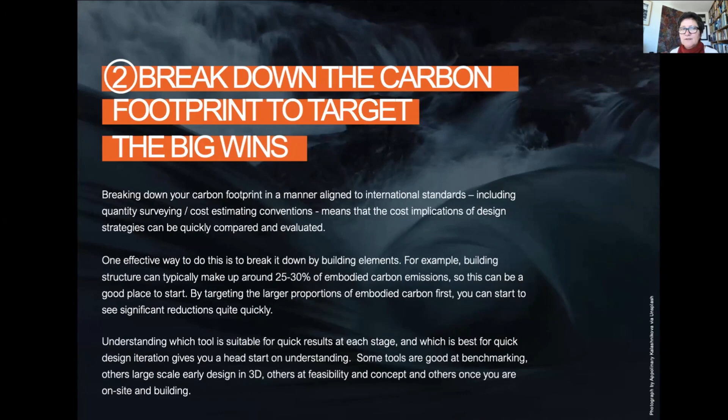We obviously have operating carbon. We all know and love embodied operating carbon, often known as scope 1 and 2, electricity, gas, etc. And that happens every single year across the life cycle of a built asset.

And then we have embodied carbon, which occurs in a couple of different phases. We have embodied carbon in the materials to make the building to practical completion. And then we have what we call replacement or use embodied carbon that occurs as we go through the asset life cycle. That can be just to maintain the asset yearly, or it could be to replace things after they've finished their life - carpet, for example, at 10 years, paint potentially at 5 years, and so on.

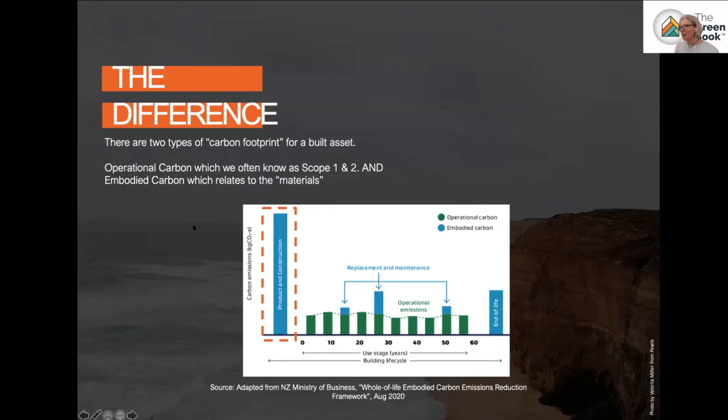So when we talk about the definition of exactly what embodied carbon is - technically, embodied carbon is the coalition of all the direct energy inputs as well as the indirect energy inputs to facilitate the organisations that make the materials, basically from the point of extraction of those materials all the way to their point of installation in the building. Some people would know this as cradle to gate.

Some of you may be familiar with the product phases A1 to A3. In this picture, we've broken the embodied carbon phases up into what we call upfront embodied carbon, which is from cradle to finished in place, doors open in the building.

And then, as before, there's also this thing called replacement carbon, and there is a scope of carbon at the end of life. What's really important to understand about end-of-life accounting for embodied carbon is that you have to separate that out, because there's a double counting problem if we claim at the end of life, but also if we're purchasing recycled materials on the upfront side, you can get this double counting problem.

So I'd like everybody to focus on what we call the embodied carbon upfront, which is these two phases of upfront plus material use. Let me go back over that: embodied carbon, from cradle to finished in place, splits into two key phases, our upfront and our replacement use phase.

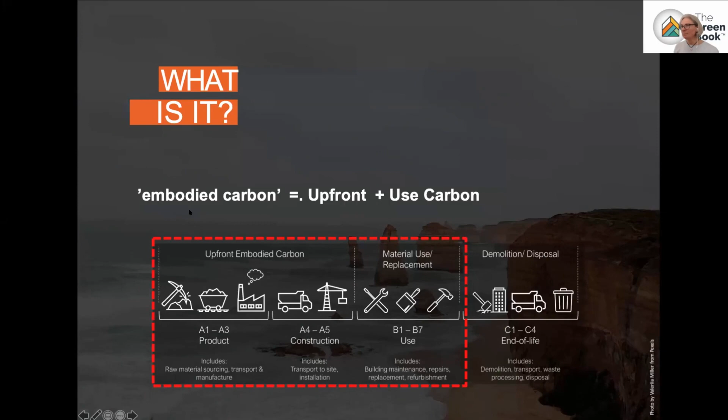So now hopefully we've got clear embodied carbon, distinct from operational carbon, with two distinct phases: upfront and use. When we think of that definition and look at global emissions from the demand perspective, one thing that's become very clear over the last 18 months to 2 years is the recut of how the global human emissions pie has been aggregated, so we can really look at, for our purposes as architects, how our demand for materials is forcing the pie chart of global emissions.

This particular chart gives us more clarity around the orders of magnitude of operating carbon versus embodied carbon, materials carbon. This reframing of the pie chart has really crystallised action globally, apart from the climate emergency, around exactly why this is such an important issue we need to get on top of. When we look at all the different industries, process energy, and energy and business exchanges, we see that materials carbon is actually significantly larger than the 10% previously understood, because that was really just looking at the process of construction, not the materials themselves.

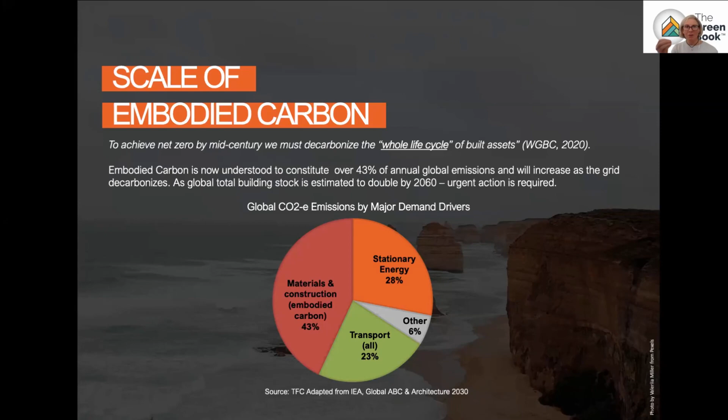Global momentum is growing, which is really quite impressive to see. I'm sure some of you have seen newsletters and all sorts of things happening in the last 12 months. In particular, in Europe, Denmark has just announced regulation of embodied carbon quotas for new commercial construction, and mandatory measurement for residential construction. Denmark, France, and the Netherlands have all adopted these stances.

In the UK, we've seen the London Energy Transformation Initiative, LETI, working with the Royal Institute of British Architects on a definition of benchmarking and quotas for targets for whole buildings by a certain date. The Royal Institute of Chartered Surveyors has an updated best practice method of measurement for embodied carbon in buildings, and Deo will talk after me about the guide being authored, which adapts that RICS best practice guide for Australia, giving us the opportunity to use it here so we can start measuring all our buildings consistently.

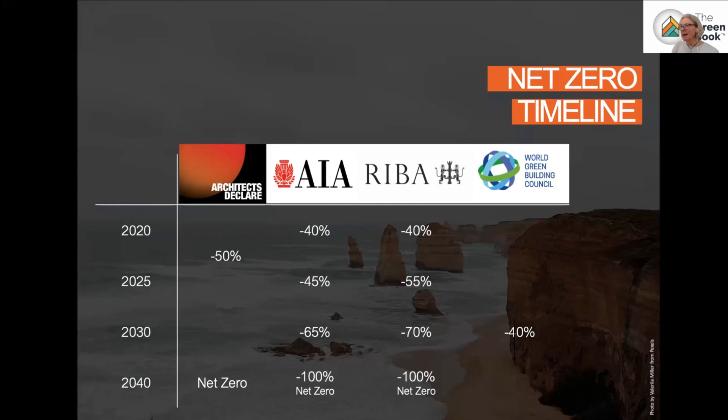As I said before, the American Institute of Architects have said we've got to get a 40% reduction from average practice now, moving through to 65% by 2030, and 100% net zero by 2040. The RIBA targets and LETI targets have just recently changed, which is about expressing embodied carbon targets by certain dates in physical quantities: 100 kilograms of CO2 per square metre, 500, etc. Those numbers are coming up a bit later.

So in terms of what we call a net zero embodied carbon building, the current definition being adopted is basically one that achieves the highest levels of materials efficiency through rigorous application of circular economy principles, then reducing down from a starting point using reuse and adaptive reuse principles, recycling, low carbon supply chain, etc. Applying those principles to get to a residual amount.

Certainly in our experience in practice over the years, we don't see at this point in time, today in 2021, that a pure net zero is a plausible thing. There will always be a residual. But having said that, by 2030, who knows? We may well have the materials supply chain evolve itself to the point where a true net zero, just through a low carbon or net zero carbon supply chain, is a plausible thing. But until that time, we'll generally have a residual amount.

And so then net zero becomes the netting off, the purchase of or achieving of on-site or off-site credits to equal the residual amount, which essentially gives us our net zero. There's certainly a lot of talk at the moment about whether the term net zero is correct, or carbon neutral. There's work being done in a couple of areas in Australia at the moment to come up with a definition of whether it's net zero or carbon neutral.

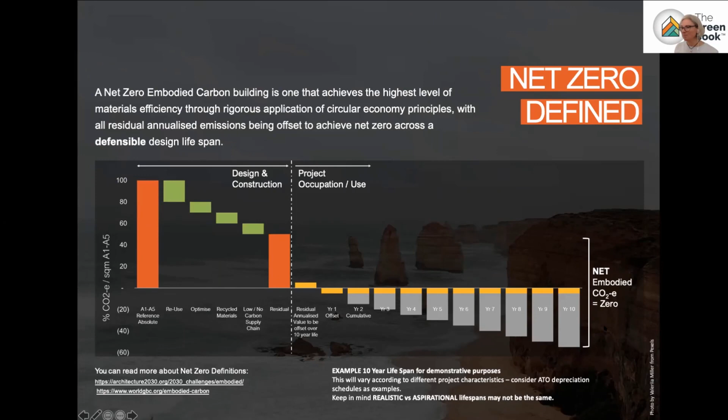When we talk about minus 40%, minus 65%, the global consensus at this point in time is that a 40% reduction from current average practice is the zone we want to be looking at today. Jumping straight into a whole building reduction is obviously a big challenge. So for everybody on the webinar, consider every individual decision you take, whether it's floor finishes or walls. If you keep in the front of your mind that each decision should get you at least a 40% reduction, then you're on your path to start implementing practice in this space.

So in terms of really trying to get a hold on exactly what is average, how big is embodied carbon, how much embodied carbon is there in buildings? I think it's been very confusing for many people over the last 12 months because we've had many publications, many targets and benchmarks published out of the UK and America. As a practitioner in this area for 20 years or so, there are a number of key variables that are really important to understand in terms of comparing exactly how much embodied carbon is in an asset.

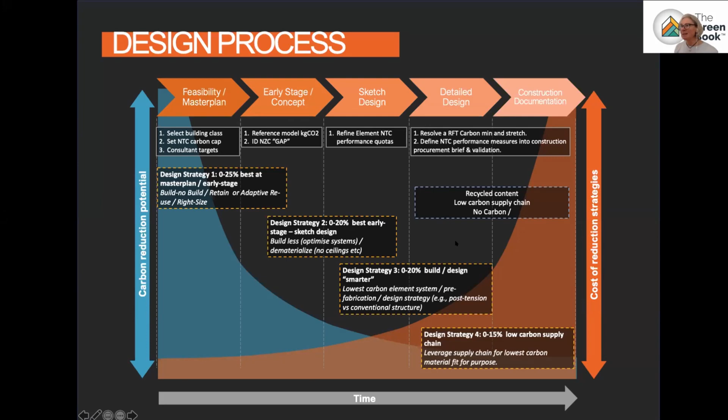I think one of the key challenges that exists, certainly with the way that some of the other calculator tools being used around the world work, is that they're very much driven just on the EPDs alone. And that becomes sometimes quite difficult to apply at the early stage process. So very much looking at how we accelerate at this early stage, and then you're looking at, well, how do I make sure I've got my bib and braces on at the other end of the supply chain, at the procurement end.

So now we're going to quickly have a look at that particular question, as I just talked about. One of the key challenges we've faced in trying to accelerate practice is that although we're getting an enormous number of product declarations coming out, the industry has also understood the challenge of comparing how comparable individual EPDs are, and it looks like sometimes they're not very helpful to you as a designer at that early stage.

If we go through the example of brick, if you were to pick up a couple of different EPDs or product declarations that exist in Australia at the moment, brick is often presented to you in embodied carbon per kilogram of brick. But the challenge for us as designers is, well, what do I do with that? Because I don't know how many kilograms of brick I need.

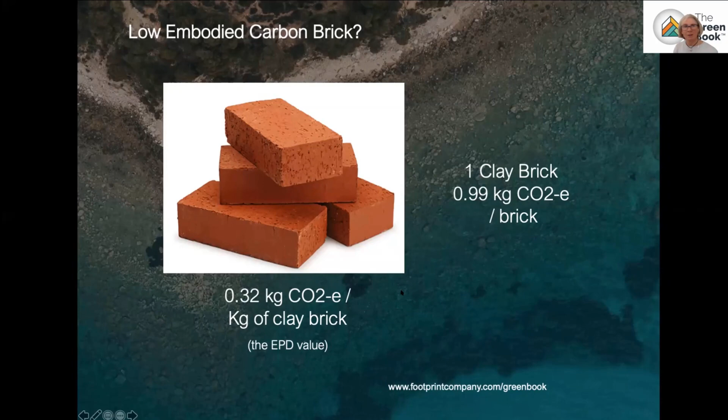And then depending on the type of brick you have, standard common and metric common, you have different amounts of kilograms per individual brick. In this case, a metric standard brick, we've got about 1 kilogram of carbon per brick. Then we think, okay, how many bricks do I need? Well, in actual fact, as a designer, what I need to know is how much carbon's in a square metre of a finished brick wall, because that's the thing I'm designing. So if we look at it, once we put that brick into a wall, we need about 52 bricks to get that 1 square metre of wall, plus a bit of waste.

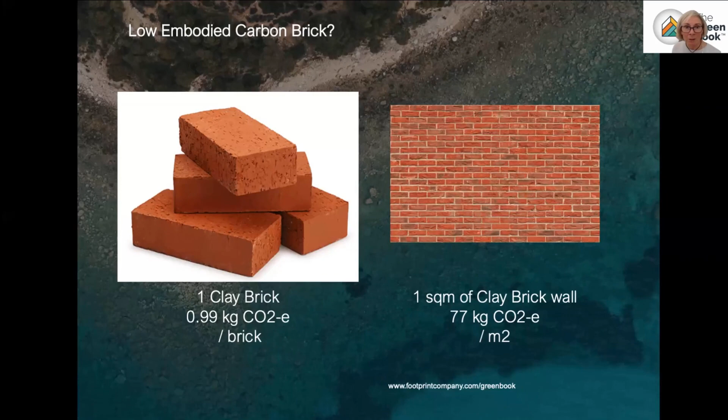Then I need some mortar to put it together, depending on how I'm going to do that. Do I render it? Do I put plasterboard on it? If we just look at 1 square metre of one skin of brick wall, then I've got about 77 kilograms of CO2 for that 1 square metre of wall. But then is that good or bad? I don't know, because I don't know.

I have half a dozen different opportunities for walls, and I'm really looking at, well, which wall system is my best bet? You can sort of see here, well, here's what I'm being given, but this is where I'm starting to look. So I really still don't understand, is brick good or bad?

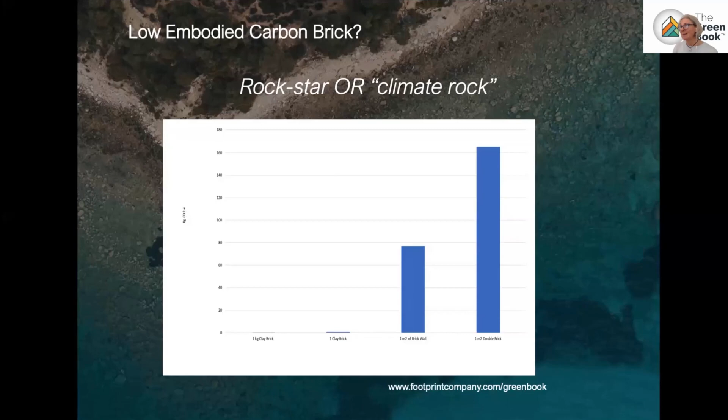So then if we have a look at different types of walls, and these walls are all 60-minute walls, we have a continuum from a typical 90 by 45 steel framed, insulated wall with 2 layers of fire check either side, or we could look at a hollow concrete block wall, my single skin of clay brick wall, a 100 mil aerated block wall, a timber framed wall with insulation plus fireproof plasterboard, or a 78 mil thick speed panel.

The embodied carbon of the finished assembly is here at the bottom. And if we take that theory of, well, what's my average wall for this particular sample, our average point here is about 68 kilograms of CO2 per square metre of finished wall. And if we go down that path of saying, okay, now I need to think about what's 40% less than that to be an efficient low carbon wall, then my number is down here, around 41 kilograms of CO2 per square metre.

And I can see basically on the selection continuum of virgin product, my options are a little bit skinny. But if I was to think about, well, what happens if I have a reclaimed brick wall? Then obviously my reclaimed brick wall would come from here, probably down into this zone. And if I had potentially fully recycled galvanised steel framing and some content of recycled plasterboard, then I'd potentially be sort of somewhere back down here.

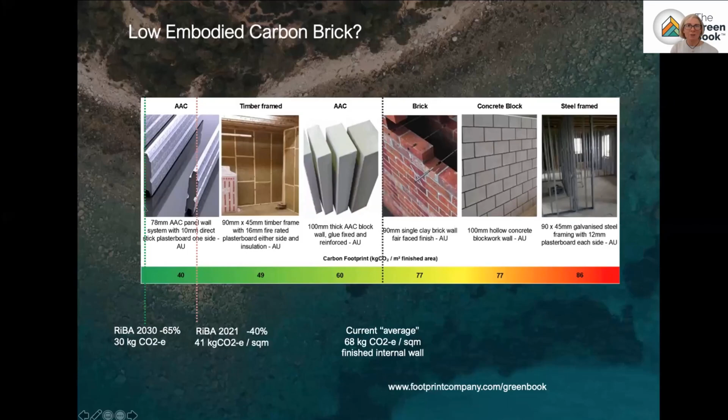So it's one thing to say, well, what is the average from our standard type of material? And then I can look at, well, where should I be looking for an efficient system today based on average materials? You can see this is the type of thinking we want to be looking at. So some of the work we've been doing with MECLA, the Materials Embodied Carbon Leadership Alliance here in Australia, is to try and start doing these types of activities for materials so we can basically understand, for a group of materials, which one is my low carbon individual material, and then how does it come together in assembly?

So here's a picture looking at just the individual material itself. We looked at brick, but then we've looked at the different wall assemblies. Now let's just have a look at concrete itself.

We've got a 32 MPa ordinary Portland cement mix here in Australia. We have a number of generic industry sources and assessments, plus high quality peer-reviewed academic inventories that we can access. When we look at averaging all of those data points for 32 MPa concrete, we find a current average value

in the order of 356 kilograms of CO2 per cubic metre of ready mixed concrete. If we apply this concept of a 40% reduction, with a plus or minus 5% for uncertainties in accounting methodologies, we see this yellow band, this horizontal yellow band, as the definition of above is not where we want to be, but below is where we want to be.

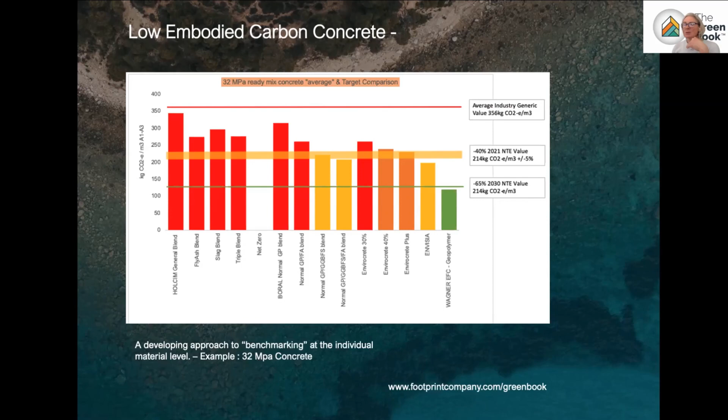And then how could low embodied carbon materials, or even recycled content materials... some of you have been very familiar with the fly ash replacements, the concept of using recycled material as replacements in materials. These are materials using that recycled content, using those circular economy principles.

Very quickly, I'm going to scoot through a couple of case examples of exactly how big this is. If we wanted to offset a typical residential house, we're going to design a 200 square metre brick veneer home and build it in Australia to typical average design. That's going to have something about 350 odd tons of CO2 in that average brick veneer.

I'm going to apply my principles, looking at recycled materials and efficient design, and I'm going to be able to achieve my 40% embodied carbon reduction. Then I'm going to be left with about 228 tons of CO2.

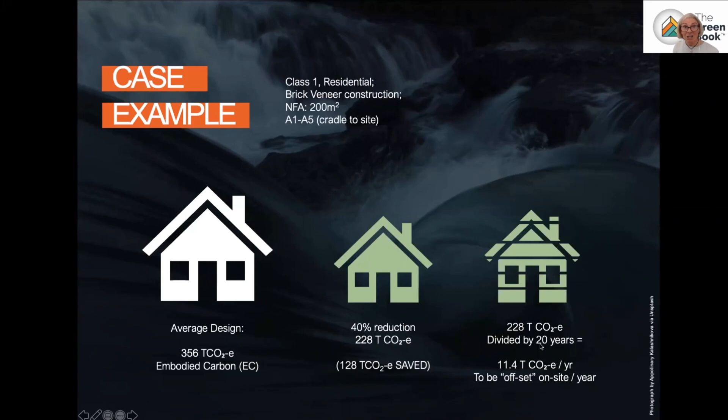I'm going to say, well, I'm just going to offset that, but annually for 20 years. So I'm going to slice that up into 20-year pieces, which means, ignoring my replacement carbon, about 11 tons of offset that I'd have to get each year to achieve that. If you're in New South Wales and able to put over 30 square metres of PV panel operating perfectly on your roof of that same house, and keep them operating perfectly for the next 20 years, that's going to be the order of magnitude for you to offset that on site.

If you were going to do a similar sort of thing for a class 5 office building, you're going to need an area something like the area of the Sydney football ground or Melbourne cricket ground, actually 1 hectare of PV panels. So at the house level scale, it's going to be potentially possible for you to do an offset on site. Otherwise, you're going to have to go and buy offsets.

In our commercial size developments, it's going to be really hard to achieve that on site. I think for me, what's going to be interesting is in the shopping centre world, where we are seeing massive rollout of solar panels all over shopping centres. And as our grid greens, it means that the output of those panels could actually be potentially redirected into offset embodied carbon as opposed to operating carbon.

I've got 2 more slides and then I'm going to be out of voice, I think. In terms of resources that are at your disposal, just a smattering of the resources that we've made available for you to think about.

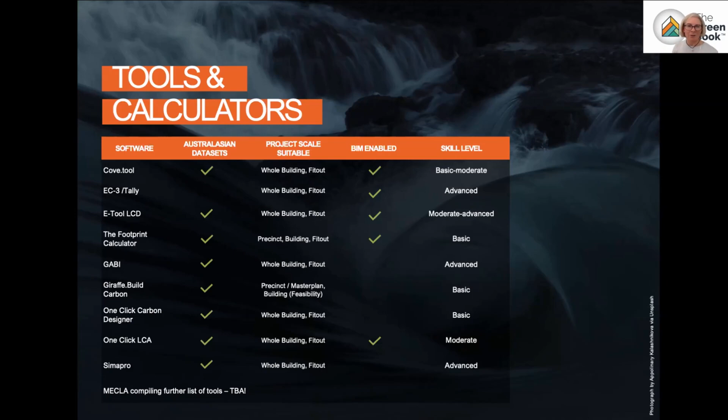In terms of your process, obviously you want to essentially at least start. I'd encourage you to have a look at the guide when it's published, because it talks about how you go about measuring your building. I'd encourage you all to think about starting to use some basic calculators, because it's important you at least start calculating some, if not all, of your buildings - because you can't manage what you don't measure. Just starting the process of accounting for embodied carbon is a really important step, and some of you I think are already familiar with some of our tools.

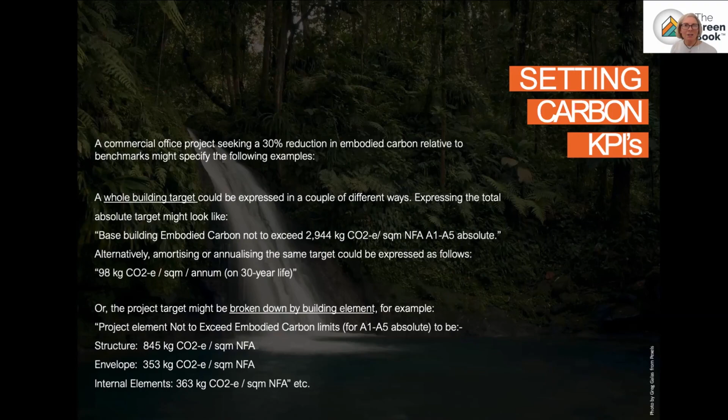It's certainly worth starting, and the thing is to really commit yourself, as you have been as architects declare - set some targets, start to measure to find out exactly how much carbon is in my building. I may not necessarily set a reduction target at this point, but certainly a lot of the practices we deal with, we encourage you to think about starting to just measure a couple of projects that you're familiar with, just to find out how much embodied carbon is in the design style I like. That's a really good starting point for you to actually start to make some practice.

Eventually, and certainly in terms of Deo's guide and also with the Architects Declare, I'm encouraging you all to at least start to measure and then get on the bandwagon of reporting internally and externally. We certainly work with a few of our architect colleagues, large practices who have even made it a core part of their design service, so that when clients purchase their services, they come with a commitment of a 40% or 50% or more embodied carbon reduction.

A little bit of extra reading I think is in here. And otherwise, I'm sure there's lots of questions. I'm going to end my show now. Oops, I think that's ended my share.

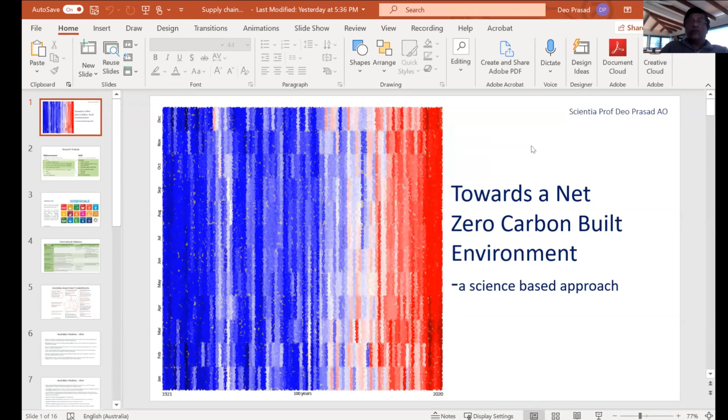So what we did was look not only at the climate emergency situation, but also how to communicate this information, which includes what Caroline has been talking about in detail, and also the operational side, on a whole-of-life basis. And what we came up with was two things: one is a book, about 280 pages or so, with a lot of details, exemplars, and policy that drives this, and so forth.

But also a 30-page guideline, which is a summary within the reading span of a professional in an office, I guess, with a few things that they can cut out and stick on the wall in front of them. This includes how to navigate through best performance, through on-site generation, through offsets, to a net zero carbon situation. So that's the book and the guide.

The guide is going to be available widely, freely, and we'll talk to Hayley and of course Caroline and others to see how it can be made available to those who wish. The book would be through Macmillan Palgrave. So that's coming out. But we put it also in the context of the broader sustainability discussion.

So you don't just look at one thing, but put it in context, because there are often trade-offs. If you're looking at efficiency on-site versus off-site purchase, there are trade-offs. At a certain point, it becomes more expensive to go beyond a certain best performance on-site to the next level. With reductions in photovoltaic costs these days, it may be a better option for offsets. But down the line, you have to look at all of it together. We also recognize there are existing buildings, and then there are new ones as well, so we look at a whole range of those.

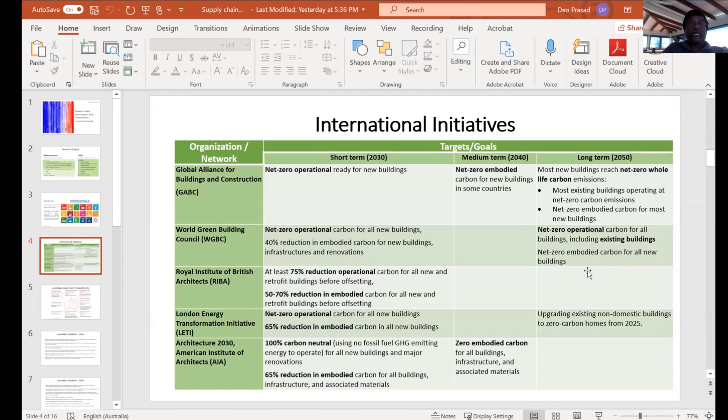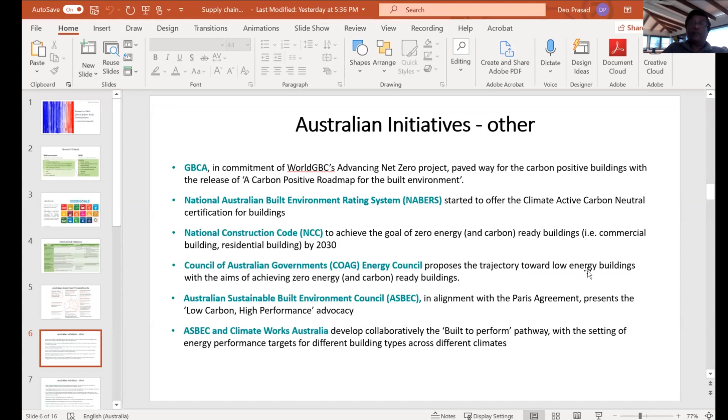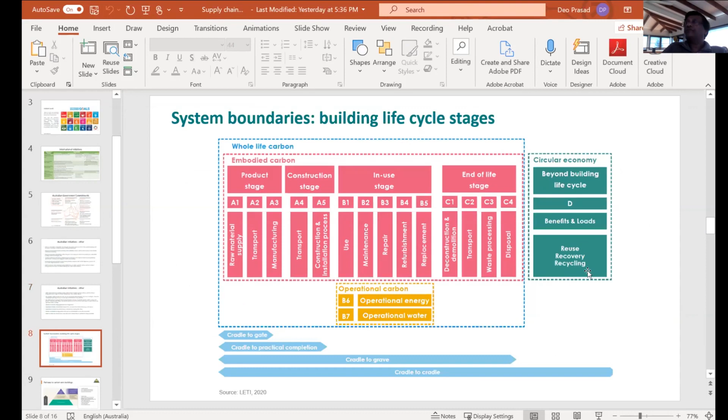We looked at literature from the Global Alliance for Buildings and Construction, which is the UN network, World Green Building Council, and Caroline's talked about RIBA, LETI, and others, and looked at Australian targets to see how we can shorten it to 2030, and looked at what NABERS and Green Building Council, amongst others, were doing, and what trajectory-based building code changes coming up we're going to deliver. And we then put it into the context of how we can, through this guide, look at a whole of life approach, as Caroline described, and then see how we can navigate to zero.

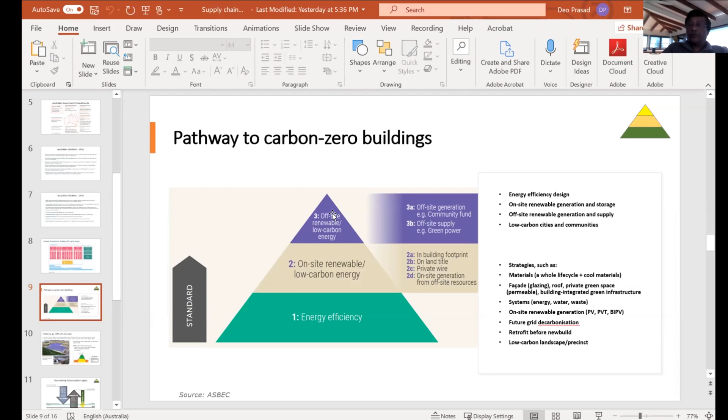The key part of the operational side, Caroline talked about the embodied part. The operational part as well is made up of efficiency, how far through good design and systems we can go to best practice, then on-site generation and off-site. There is a need for a client-designer conversation in all of this to look at where the trade-offs lie, in terms of how much you spend on efficiency and at what point the offsets become more cost-effective based on what sources you're looking at.

At UNSW, as an example, we have existing setups, some new buildings coming up, but we looked at what we can do on site, with very limited roof areas, through efficiency and generation. But then we looked at a huge gap that was remaining to go to net zero carbon. So we invested - the university spent money on looking at offsite. There's a photovoltaic power plant near Mildura, which is where we get our offsets from. So we know where it's coming from, and we have an intermediary we go through, and we generate.

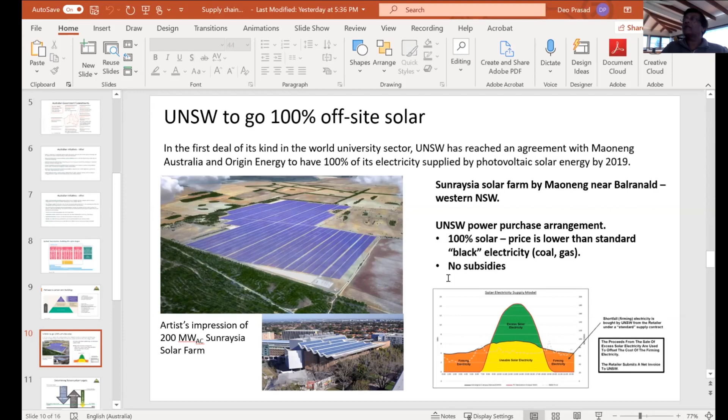So the pathways to zero can be done in a much shorter time. Many of us, including myself, live in net zero operational carbon building homes at the moment because it's the cheaper option in any photovoltaic pays back in 3-4 years these days. So we looked at the whole building stock in Australia, different climates, different ways of building in different parts of the country, and for different building typologies according to the BCA.

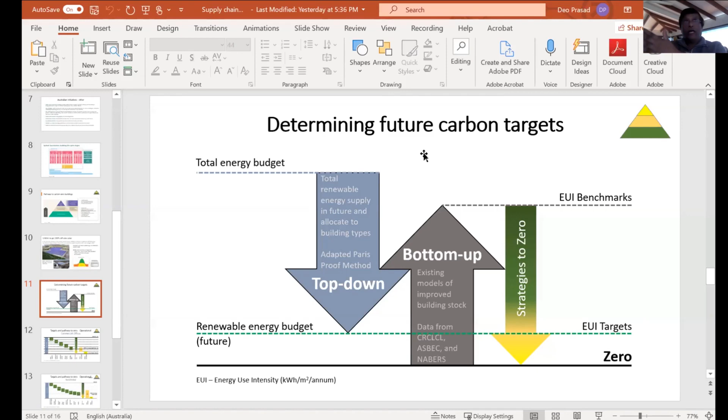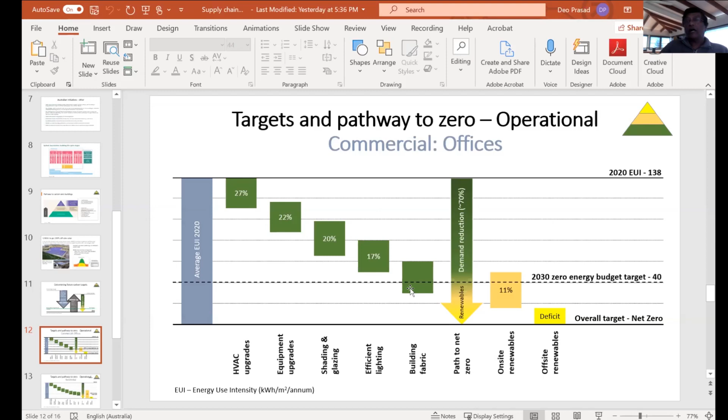We looked at the top-down approach and a bottom-up approach to how we deliver on this, including offsets, and came up with, for different building types, from best practice - in other words, the energy use intensity that we can achieve - what is current today, and how we can progressively reduce them to a level where on-site generation and offset can actually deliver. So these are well calculated, and we have it for different building types as well. And we set a challenge basically.

This is a diagram we actually like a lot, after Malay came up with it. From 2021, how can we navigate - and we set different targets for different building types, both operational and embodied, in terms of offsetting. And trying to deliver net zero by 2030 and net zero embodied by 2035, hopefully, but 2040 for sure, through mechanisms like what Caroline earlier described. So this is feasible.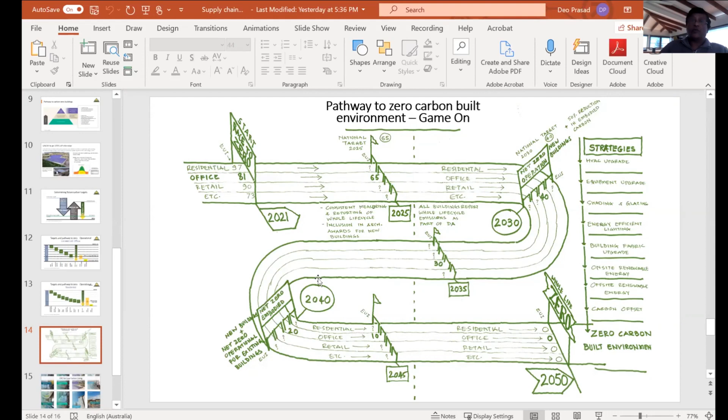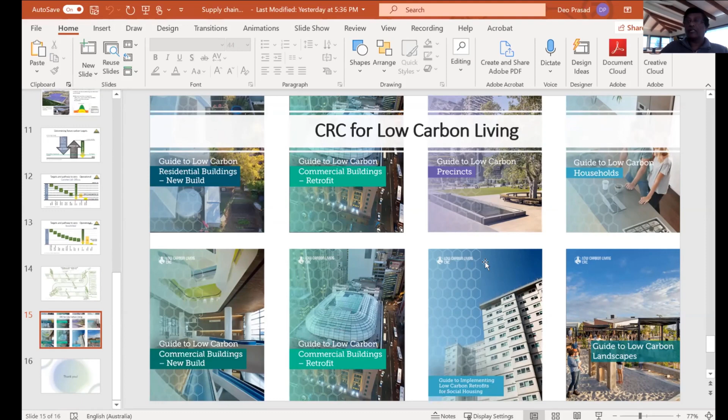The guide will contain a lot more information on what and how, and exemplars in the books and so forth will describe exactly how best we can do this. There's a lot of information freely available on websites like the Low Carbon Living website on low carbon design, retrofits, new and old, and all that sort of stuff. Hopefully you can draw from that and use as much of that as possible.